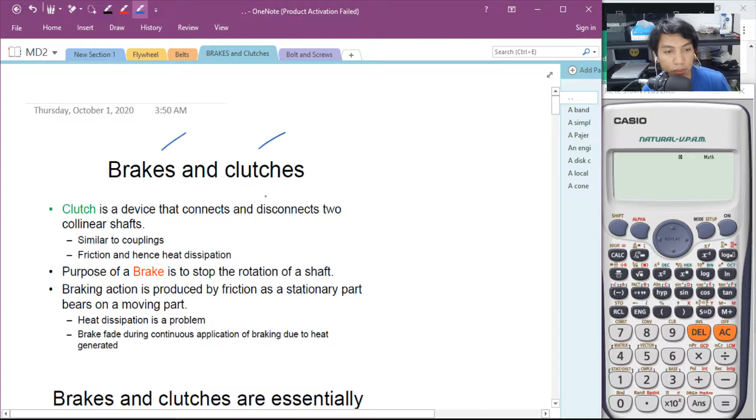Okay, today we will be discussing another machine component, which is brakes and clutches. Let's see what is the difference between the two and what are their similarities. So, brakes and clutches - commonly, who here has cars? The automobile enthusiasts among us already know what brakes and clutches are, and they are important parts of your machine to stop it and to transmit power from your engine into the wheels.

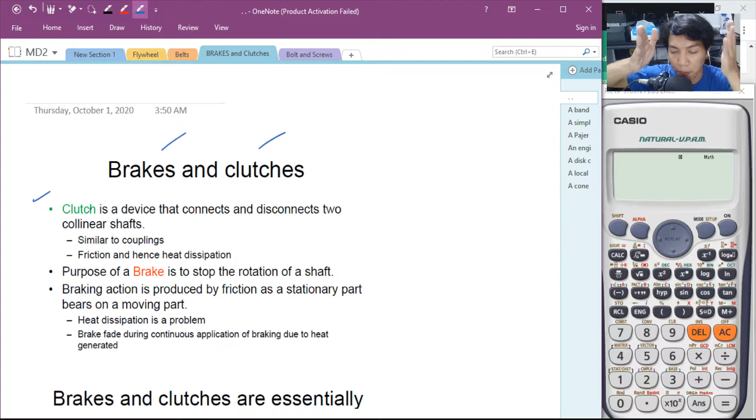Now, let us go with the clutch. The clutch is a device that connects and disconnects two collinear shafts. That means your clutch, from the word itself, is a part of your machine where you have an engine shaft and a drivetrain shaft, and your clutch is two connecting bodies that use friction in order for you to connect two moving shafts. This is the disconnection and connection between the two shafts. Now, the power is transmitted from the engine shaft to the drivetrain shaft, and it becomes smooth using your clutches.

Now, if you have a manual transmission car, your clutches have a clutch pedal. Commonly, in a manual transmission automobile, on the far right is your gas pedal or accelerator pedal. In the middle is your brake pedal, but let's talk about that later. And then on the far left is your clutch pedal.

Now, in order for you to disconnect the power that is transmitted from your engine, you press the clutch. And when you want to modulate the power given off by your engine, you slowly press the clutch little by little. So that means your clutch uses friction on its faceplates or discs in order for you to transmit direct power coming from your engine.

And your clutches are commonly similar to your couplings, where your couplings are connecting bodies that use faceplates which have bolts, where you connect those bolts from the faceplates to the adjacent plate or opposite plate so that your two shafts connect.

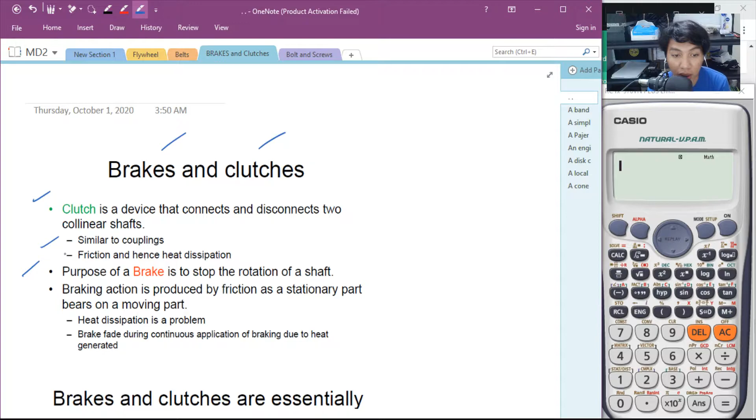So that is the braking action. The clutch transmits power, while the brake stops power transmission to your wheels or to your shaft.

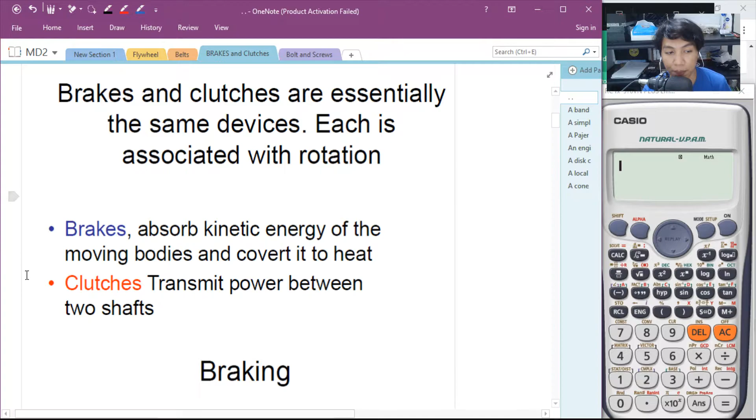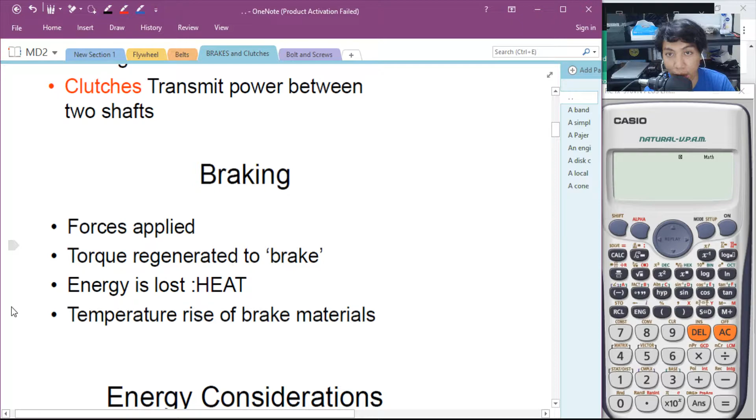Now, brakes and clutches are essentially the same devices. Each is associated with rotation. Number 1, brakes absorb kinetic energy of moving bodies and convert it into heat. That is the brake. And clutches transmit power between two shafts using friction. Now, for braking action, you apply a force in order to create braking action, and torque is generated.

That torque is used to brake, to stop. The energy lost is during heat addition. Now, when temperatures rise, what happens is the braking materials disintegrate in their capacity to hold off friction.

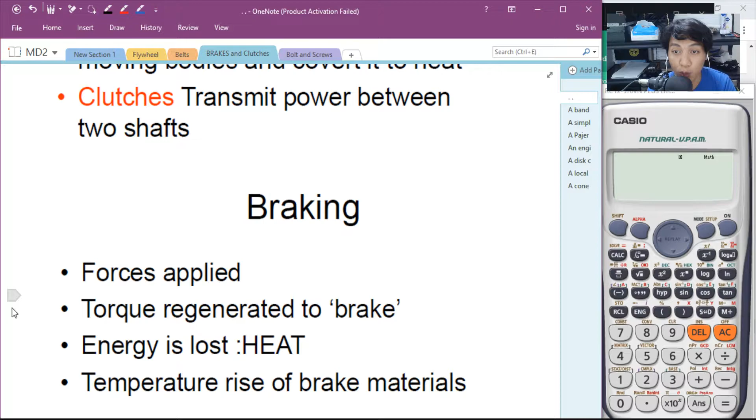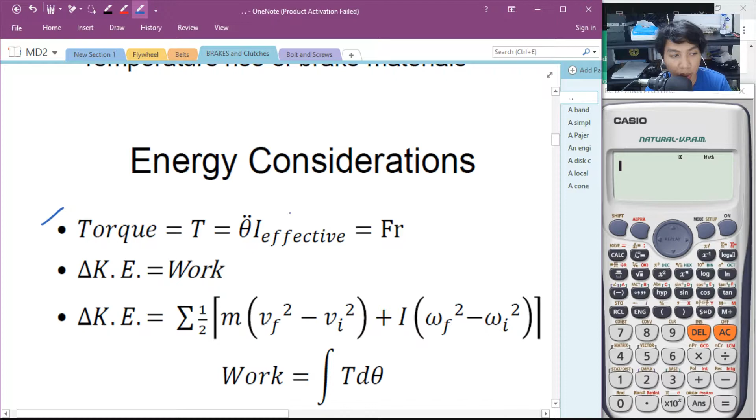Now we have energy considerations during braking. Number 1, the torque that is applied. Commonly, the torque applied is the force applied at a certain distance. The torque here is commonly referred to as the moment arm for brake levers, and for drum brakes, it's the rotational distance relative to the force applied. Another one is the work done during braking, that is the kinetic work. And then, the work that is lost due to heat.

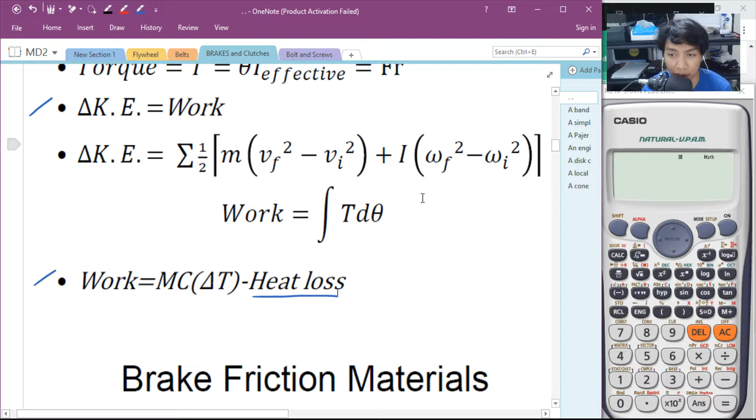Sintered materials are composed of cuprum, which is copper, ferric or ferrous iron, and other friction modifiers. When braking action is applied, heating occurs. After heating, they don't dissipate or disintegrate. What happens is they become harder and don't flare up immediately.

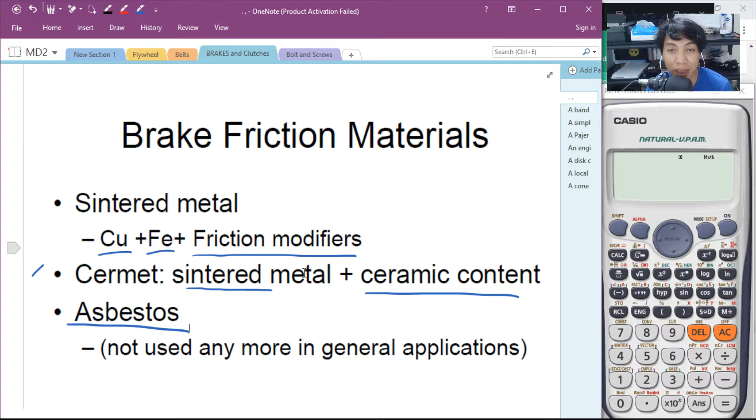Now, for technical characteristics, your brake pad should have friction coefficients between certain values. So they should be high friction, around 0.3 to 0.5. And then, continuous or repeated friction applications should be possible, and it should be invariant to environment conditions. Will it be wet? Will it be snowy? Will it be tarmac? The environment conditions, whether hot, summer, or all-weather, affect its braking capacity.

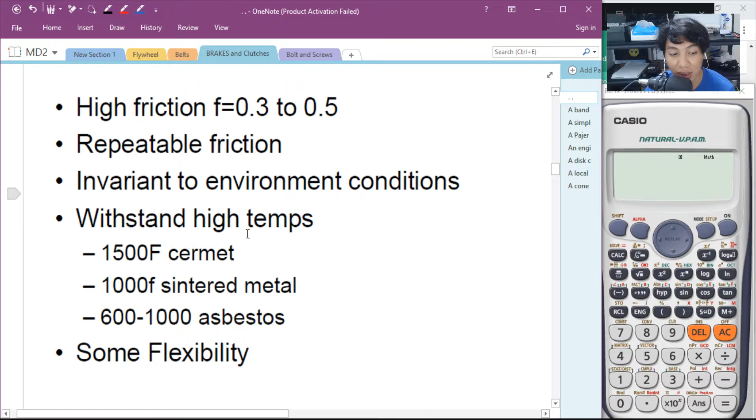Now, it will be able to withstand high temperatures. For cermet, that is 1,500 degrees Fahrenheit. 1,000 degrees Fahrenheit for sintered materials, and 600 to 1,000 for asbestos.

And with some flexibility. Now, let us look at the model of a clutch and brake. You have two shafts there, with rotational speed and rotational inertia. Now, the clutch or the brake are the ones responsible for stopping the rotation of this shaft and that shaft. Or your clutch is the one that transmits power coming from this driving shaft to this driven shaft. That's basically it.

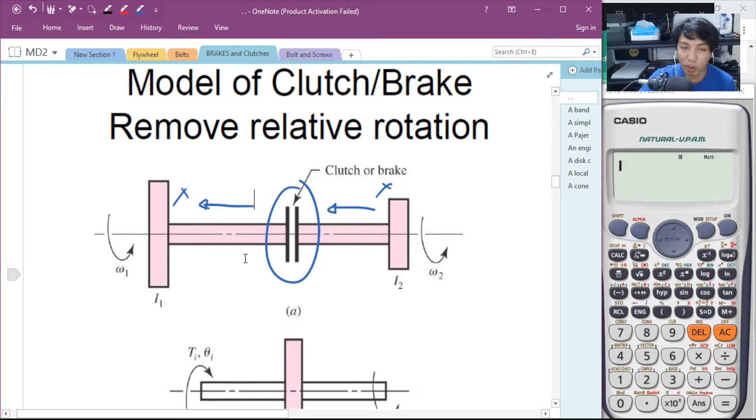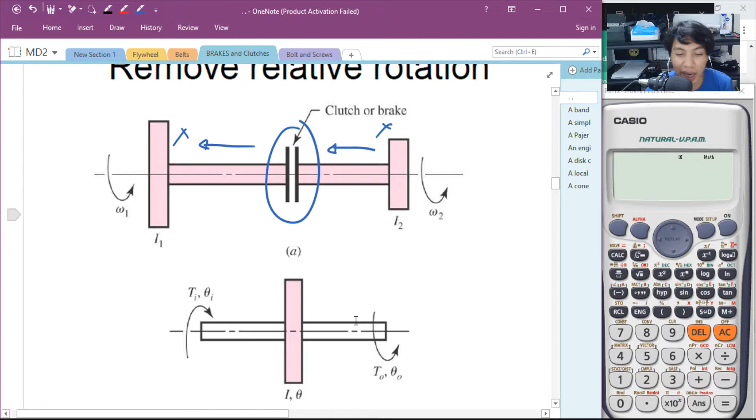Now, when the two come into contact, if a brake comes into contact with another faceplate, what happens is it will stop the rotation of both shafts. When a clutch comes into contact with another faceplate or another clutch, like in multi-disc setups, what happens is the power is transmitted from the driving shaft to the driven shaft.

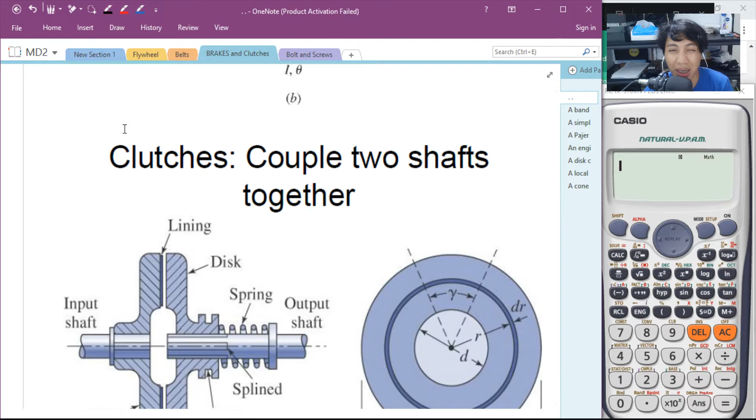Okay, now let's go to clutches. The clutches are used to couple two shafts together. Now, it's not just one clutch that's used there. For motorcycles, big bikes, if you ride big bikes, I'll give an example. A big bike with a simple manual transmission uses multiple disc clutches. It can't be a single disc.

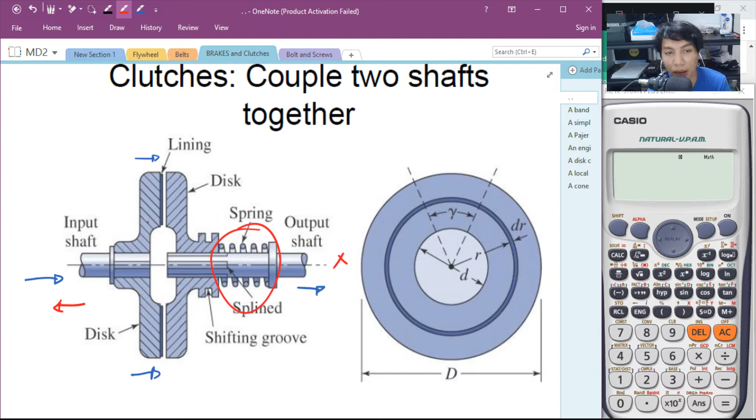Okay, now yung spring mo, dito, it absorbs first the energy ng push ng iyong shaft. Ngayon, pag nag-twist yan, saka lang siya magkakaroon ng motion. Ang iba dyan, ginagamitan ng splines na shafting. Yung iba, gumagamit ng tinatawag nating synchronizer, kung saan imamatch niya yung speed ng input shaft to the output shaft, para hindi abrupt yung pag-transfer ng motion wheel to wheel, and from input shaft to the output shaft. Kasi mangyayari, magkakaroon ka ng torsional deflection kapag abrupt yung pag-transfer ng power.

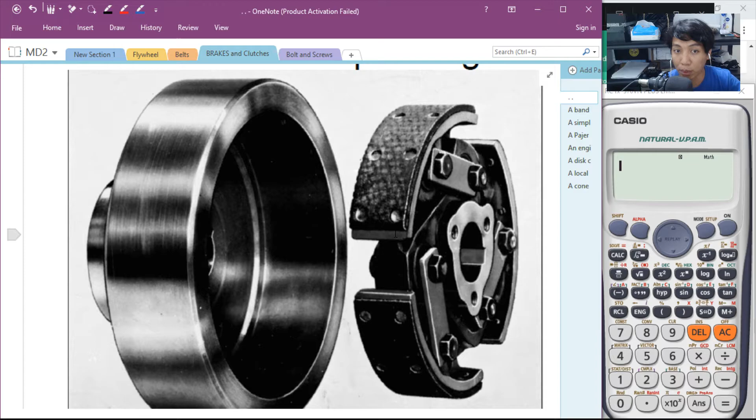Now, an internal expanding of your brake, drum brake. So yung drum brake mo, it is the drum and this is the brake shoe. Yung brake shoe mo, that will come in contact kapag nagkaroon ka ng push effect dyan, it will come in contact with your drum brake, i-stop niya yan. Yan lang naman yung mga common knowledge dyan, yung sa akin, that is common, very common, hindi naman yan expert knowledge.

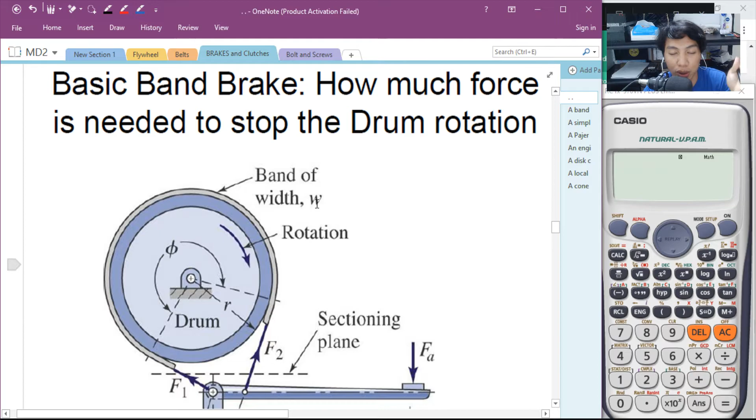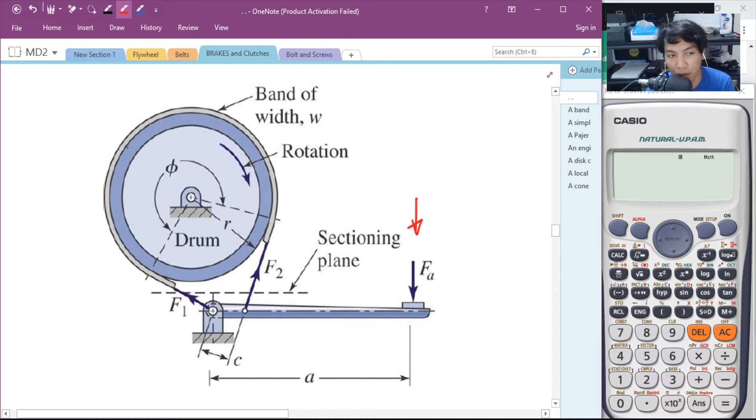So this is a basic band brake, and how much force is needed to stop the drum rotation. Commonly, you have an applied force kung saan meron ka ditong slack side and tight side ng band brake. Band brake uses a band, either leather or rubber. Yan yung ginagamit mo, and then this is the drum. Pag prines mo itong shoe, prines mo yan, okay? I-apply, itong band brake mo, ito yung i-stop ng rotation nitong iyong drum.

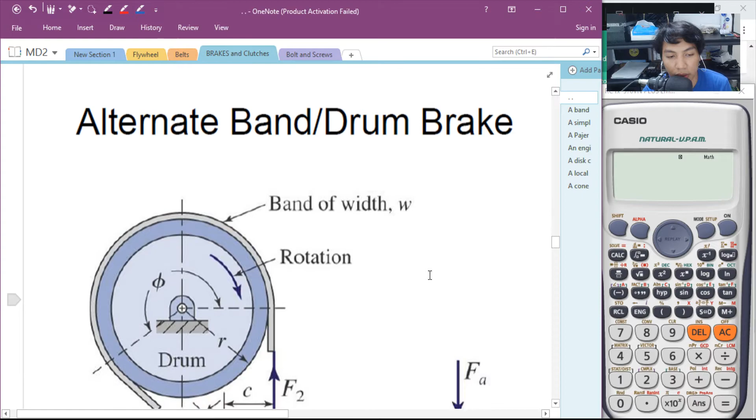Okay, and this is the moment arm. Ngayon, ito yan, the alternate band brake, pwede rin merong naka-angle siya. I-discuss ko na lang sa inyo pagdating ng mga problems. Now, a cantilever drum shoe brake, kung saan ang shoe mo, ang contact lang niya is in here, ito lang yung contact niya. Karaniwan, itong iyong band brake, ang contact niya is yung hanggang dito, ang laki ng contact, yan.

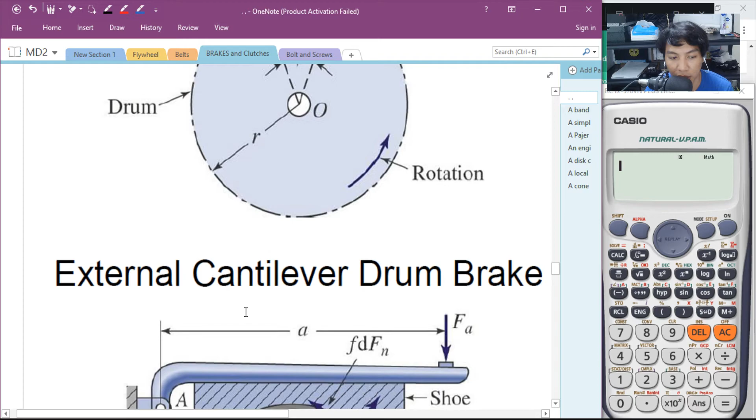Ito naman yung external. Kapag external, ibig sabihin, ito kasi ang pushing motion mo, andito, push mo yan, pupunta dyan. Itong external naman, ang push mo, mas malaki yung shoe brake. Medyo mahirap pag pinag-derive ko, hindi ko na i-derive. So, meron na akong mga summarized formula dyan na gagamitin.

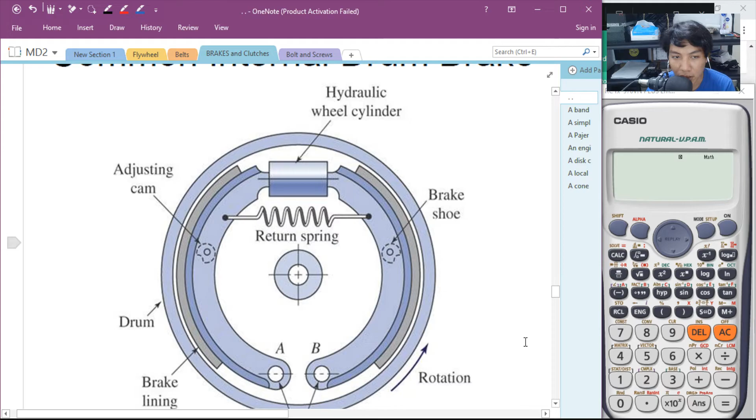Now, for common internal drum brake, pag nagkakalas ka, ito yung hydraulic wheel cylinder coming from yung master cylinder mo. Kapag nag-brake ka, nilalagyan mo ng brake fluid yung master cylinder mo. Ngayon, yung fluid mo, papasok dito sa iyong hydraulic wheel cylinder, ipupush niya itong dalawang brake shoe. Pag pinush niya yan, ang push niya dyan, yan, kasi nandito yan meron niyang cylinder. Okay, coming from master cylinder ng iyong engine, ng iyong kotse. Pinush mo dyan, may piston yan dito, may piston yan dito. Pinush niya yan, ito, pupunta rito sa iyong drum. Okay, pupush niya yan.

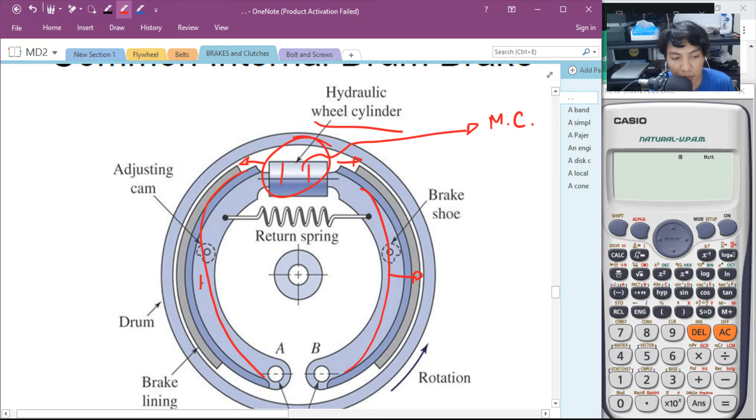Para hindi siya mag-lock, para hindi mag-lock itong mga brake na ito, meron siyang return spring na kailangan sa gitna.

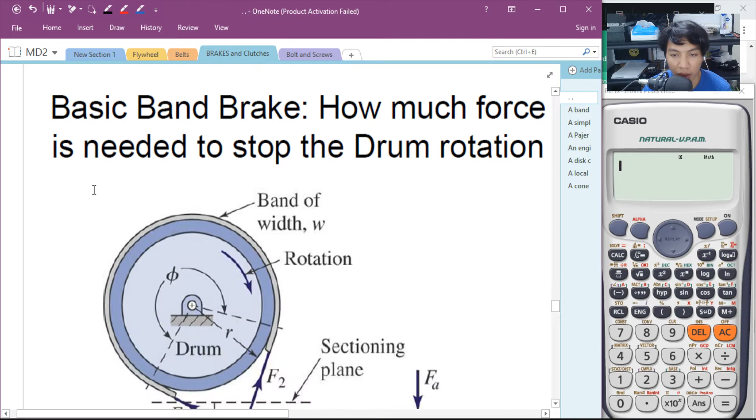Now, for the summary ng ating formula, dinerive na dito. The notation of the band type clutches, kung saan meron kang ito yung slack to slack. This is the tight.

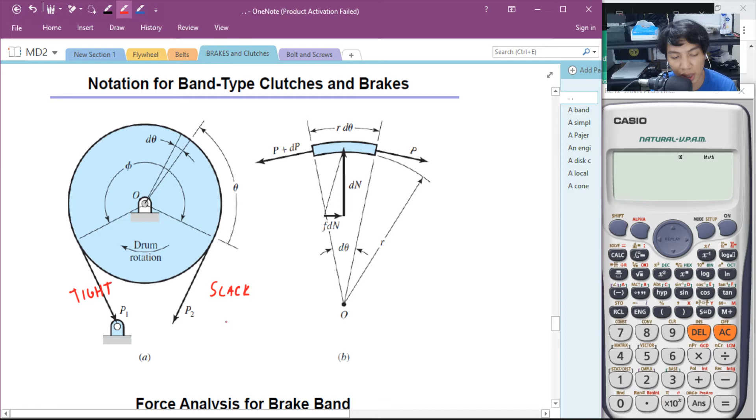Sila siya laging inihila. Now, for the force analysis ng band brake, ito, dinerive na siya. You will arrive with this, the same width, yung sa belts. This is the P1, the tight side. Itong P2 is the slack side.

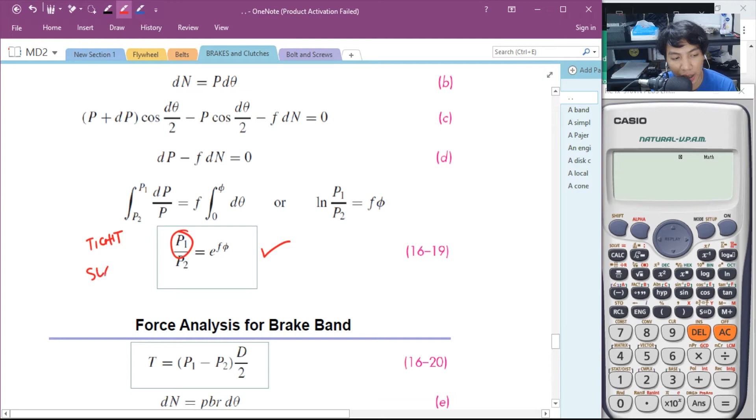Now, for the torque of the band brake, dinerive na. The torque that is applied on the band brake, that is the tight side, slack side, multiplied to D over 2.

Pwede rin naman, di ba? The torque is equal to F R. Ito yung force, ito yung net pull. Ano yan? Net pull ang tawag dito, net pull ang tawag dyan for the force.

Now, D over 2, di ba equal yan sa R? Yan na yung summary niya.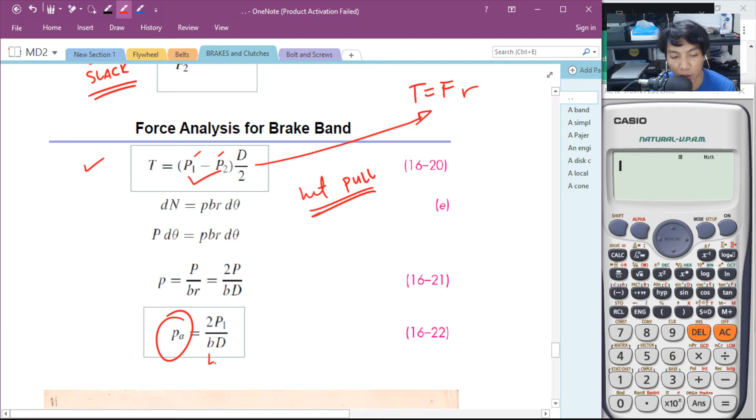And then, the applied force is equal to 2 over B, which is the width of the brake, and then the diameter of the drum. Yan, diameter of the drum.

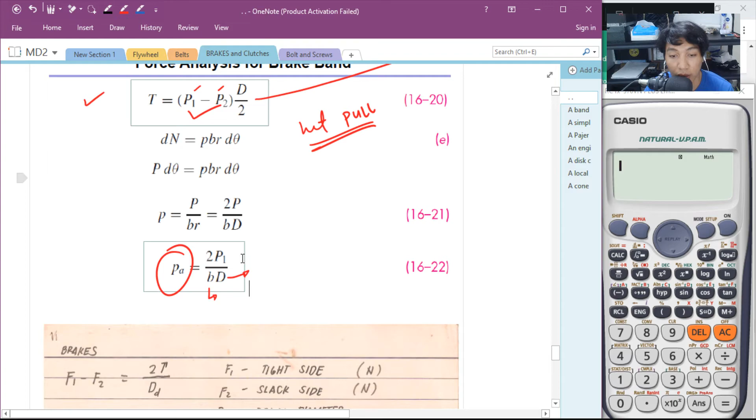And then P1 is the force on the tight side. Now, I have here the summary ng formula mo where F1 minus F2 is equal to 2 multiplied to the torque over DD. Ano ba yung DD? That is the drum diameter. F1 is the tight side, F2 is the slack side.

Now, in order for you to solve for the coefficient of friction and then the angle of contact, gamitin mo yung formulang ito. F1 over F2 is equal to E raised to the frictional coefficient multiplied to theta. And theta should always be in radians.

Now, let us go to the clutches. For disk type clutches, sasabihin naman yan sa problem. The torque on your clutch is given off by this formula, where N is the number of contact surfaces. Yung contact surface, sinasabi yan sa problem. Or, either it is the number of pairs and the number of clutches. Kapag sinabing number of clutches, lagi mong babawasan ng isa.

Yung total, and FA is the axial force that is applied dun sa clutch. And then RM is the mean radius and N is the angular speed. Now, in order for you to get the power that is applied by your clutches, this is given by this formula: N, F, FA, RM, N. Ano yung factor dyan? The factor is 63025.

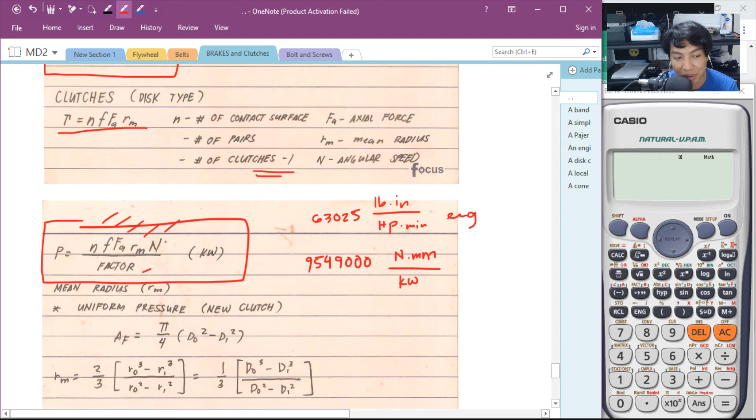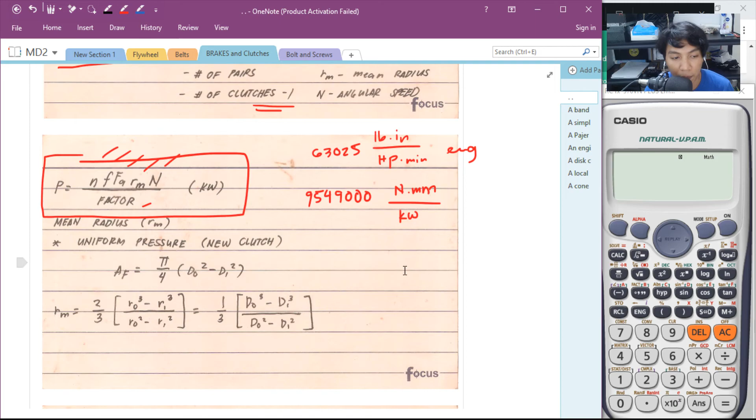Now, dito, makukuha natin yung area of friction, frictional area, kapag uniform pressure and uniform wear. Kapag sinabing uniform pressure, we say that uniform yung pagkaka-apply ng push or stress dun sa iyong clutch, where it is new, bago pa siya, wala pang wear eh. Bagong-bago pa siya, so lahat ng face niya, ng faceplate niya is in contact with one another.

So, you are to consider the inside and outside diameter ng clutch. Now, in order for you to get the mean radius, it is given by this formula: 2/3 multiplied by yung bracket, RO cube minus RI cube over RO squared minus RI squared. Equal din yan sa, kapag gagamitin mo naman yung diameters, ito yan, 1/3.

Now, if uniform wear, or the old clutch, sinabi nga uniform wear, ibig sabihin pantay-pantay yung pagkakagasta. Now, that is equal to yung area of friction is equal to 2 pi Rx. Ano po ba yung Rx? Rx, if not stated, that is equal to Ri, or the inner radius, where Rm is equal to Ro plus Ri over 2, equal to Do plus Di over 4.

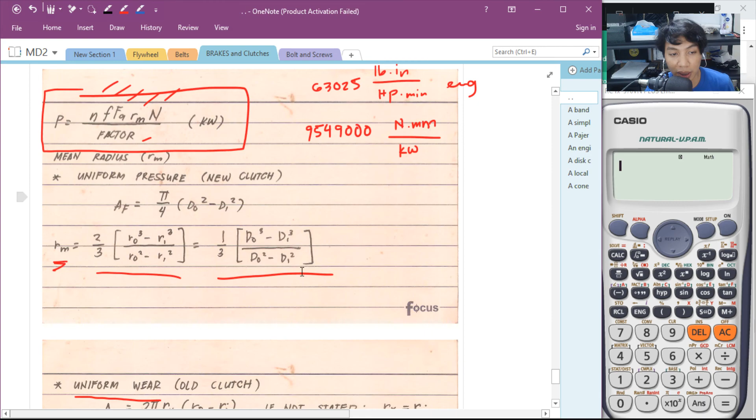Ibig sabihin, hindi mo na kailangan pagdaanan ito. Kapag new clutch, mahaba ang formula. Kapag old clutch, kukunti ang formula.

Now, when we are talking about cone clutch, hindi yan katulad nung disc clutches. Yung cone clutch is pa-cone, yung clutch mo, ito yung clutch. Ito yung cone na kung saan it will come in contact with a transmitting shaft. Kukunin mo yung cone angle dito. The cone angle is alpha.

Okay, the alpha. Now, ganun pa rin naman: N, F, FA, RM, multiplied to N over factor multiplied to the cone angle, sine alpha. Very basic lang po yan.

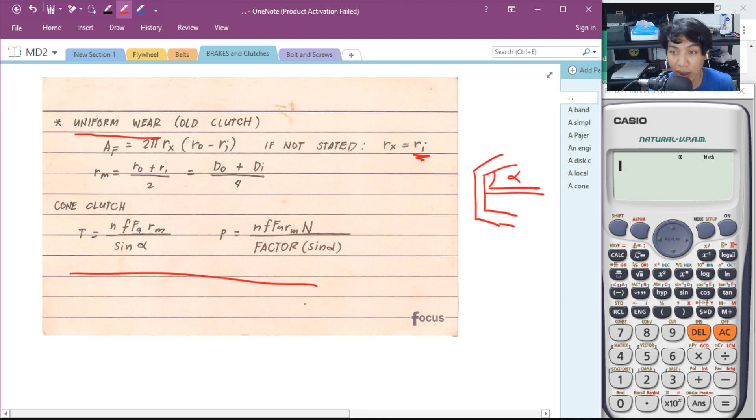What better way for us to understand it is to apply it into 7 problems na na-prepare ko rito. So, the 7 problems will be divided into 2 and it will come out after this discussion. So, stay tuned.